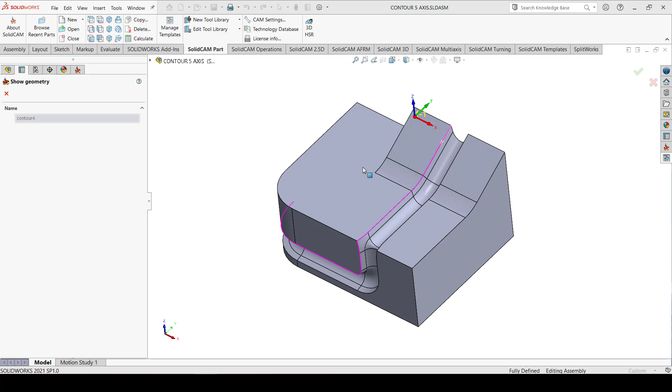So how it works basically is you define the edges. So you have a drive curve, which is basically the edge. You just pick the edge, and what you also have is the orientation lines. So why a surface is not needed is because you define the orientation lines, and the orientation lines basically will help you to align the tool to the particular line at the particular position. So you really don't need to define any surfaces.

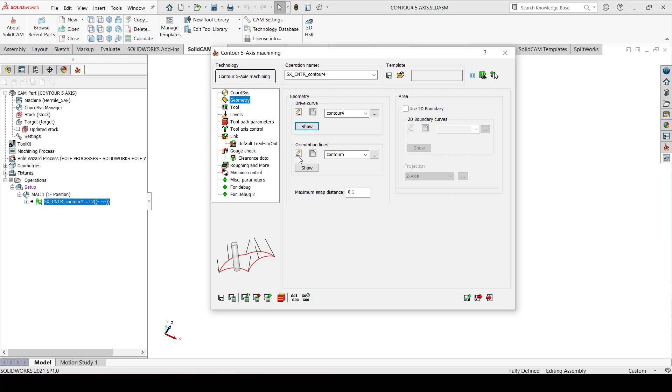So in this case, these are my orientation lines. Now in this case, I have used the surface edge itself as the orientation lines. One could make a 3D sketch or even a 2D sketch as the orientation lines.

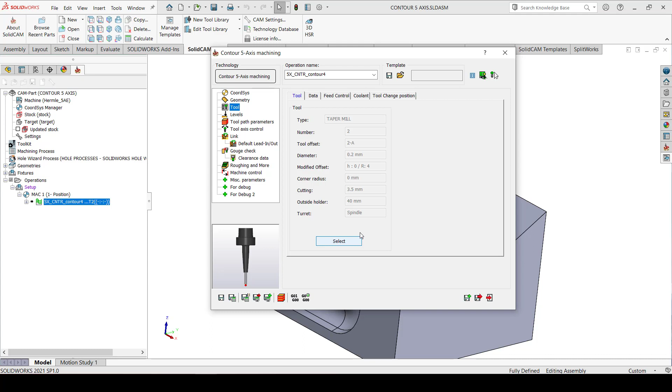The tool could be anything. We could use a ball nose, a bull nose. In this case, what we are doing here is we have used a chamfer or a chamfer drill kind of a tool, which will allow us to make a chamfer on that edge. Okay.

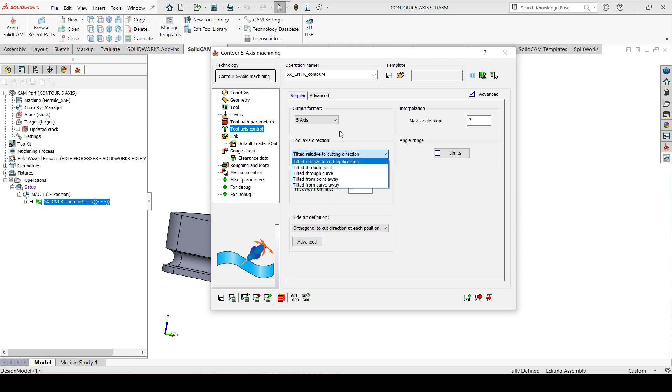In the tool axis control, you can see that it's relative to the cutting direction. Okay, there are not many options in this case. It's relative to the cutting direction or through the point, curve, point away or curve away. And that's it. We have just given the lead in and lead out, and we hit the calculate button. It's a pretty quick calculation since it doesn't involve any kind of surfaces.

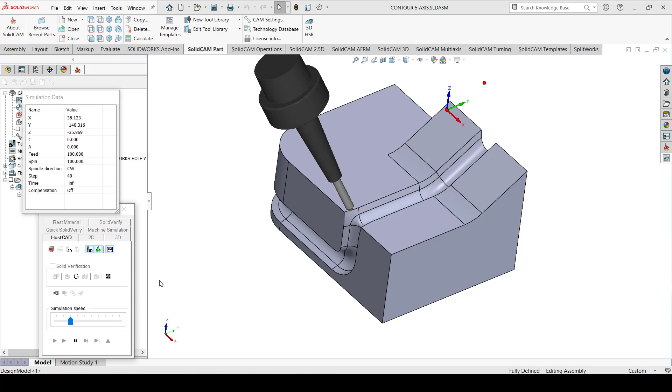And if you run the simulation, this is how it's going to look. So let's reduce the speed. So it just follows the curve, nothing else. Follows the curve, and the orientation lines determine the tool axis direction. So you can see that you can do a very nice toolpath here to do the chamfer of a particular part.